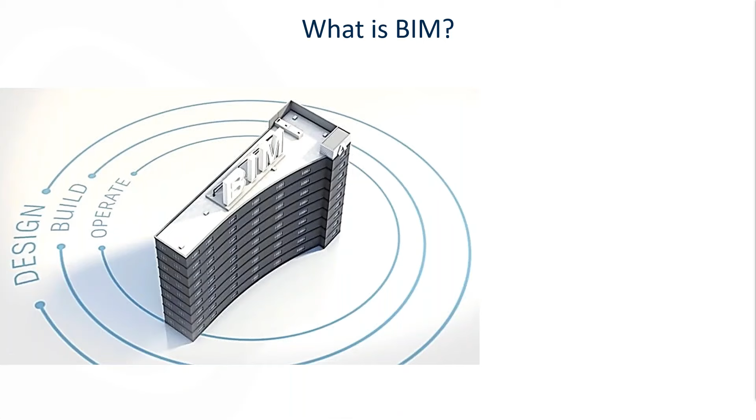Great. So first of all, let's look at BIM and what exactly it means. So if we look at BIM as ISO 19650 defines it, they define it as the use of a shared digital representation of a built asset to facilitate design, construction, and operation processes to form a reliable basis for decisions. So a built asset includes but is not limited to buildings, bridges, roads, and process plants.

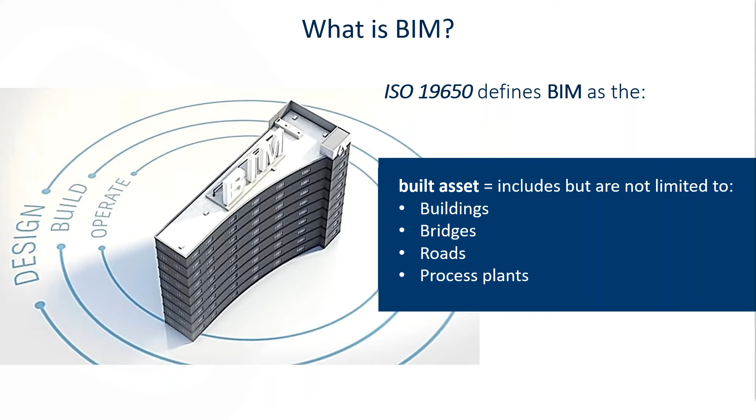So if we had to put this in more simple terms, when we look at what BIM means, I like to break it up into 3 tiers. First of all, BIM stands for Building Information Modeling, and it's a working process. So some people confuse it with a software or an object only like a Revit model, but it's really an entire working process. And with this process, it's applicable to the entire project lifecycle.

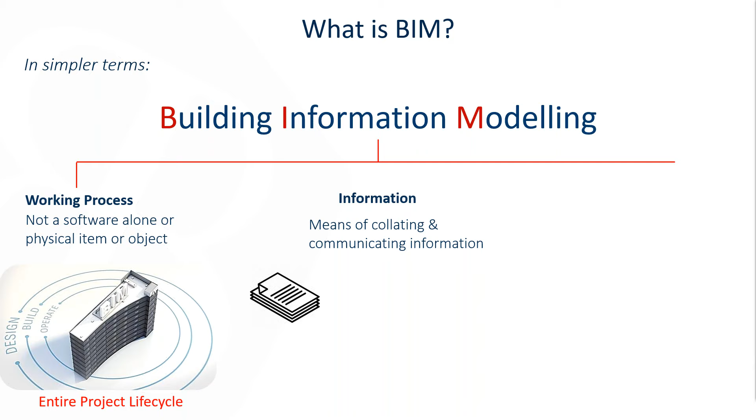Then a very important part of BIM is that it's really all about the information. In other words, it's a means of collating and communicating information on a construction project throughout the project's entire life cycle, like I've mentioned. And it's also a process whereby diverse packets of data are brought together in order to enable information exchange between the right people at the right time, which is essentially collaboration.

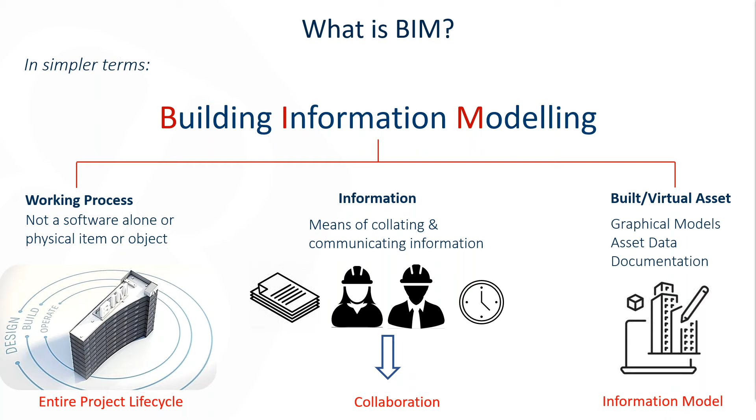Then it's also a process of building a virtual asset, which consists of graphical models, asset data, as well as documentation. This is also commonly referred to as the information model.

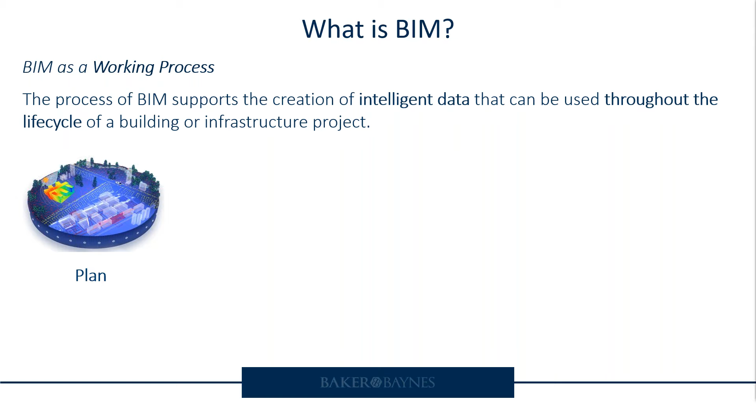Then if we look at BIM as a working process, the process of BIM supports the creation of intelligent data that can be used throughout the life cycle of a building or infrastructure project like I've just mentioned. Now, during the initial planning phase, BIM can be used to inform project planning by combining reality capture as well as real-world data in order to generate context models of the existing built and natural environments.

Then also further along the line is during the design phase. It also helps during this phase with the conceptual design, analysis, detailing, as well as documentation. And also during this pre-construction process, you can start using BIM to inform scheduling and logistics.

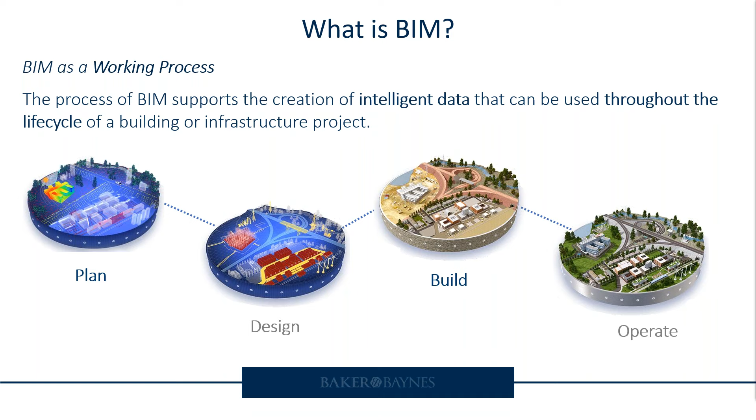Then during the construction phase, the fabrication begins using the BIM specifications that were set up. Project construction logistics are shared with trades and contractors to ensure optimum timing and efficiency. Then with project handover, BIM data carries over to operations and maintenance of the finished assets. So the BIM data can be used down the road for cost-effective renovation or efficient deconstruction as well.

Then if we look at why BIM is important, it allows design and construction teams to work more efficiently, and also it allows these teams to capture the data that they create during the process in order to benefit operations and maintenance activities.

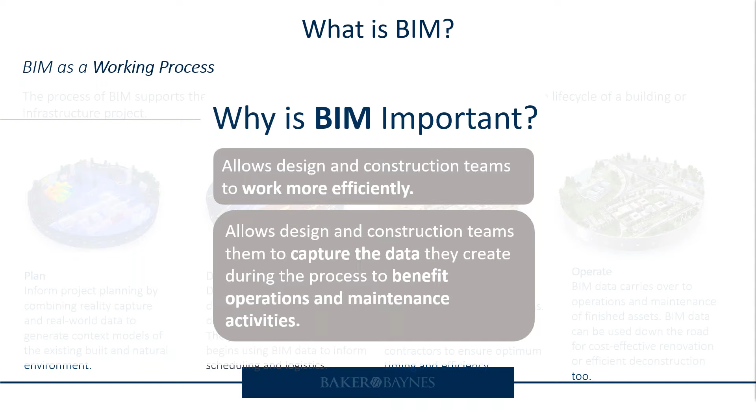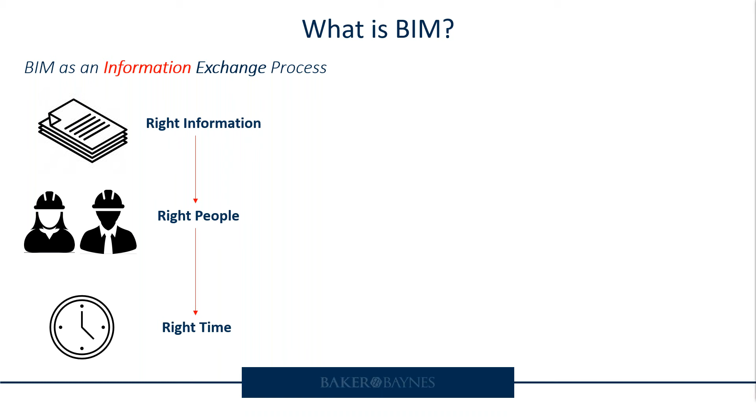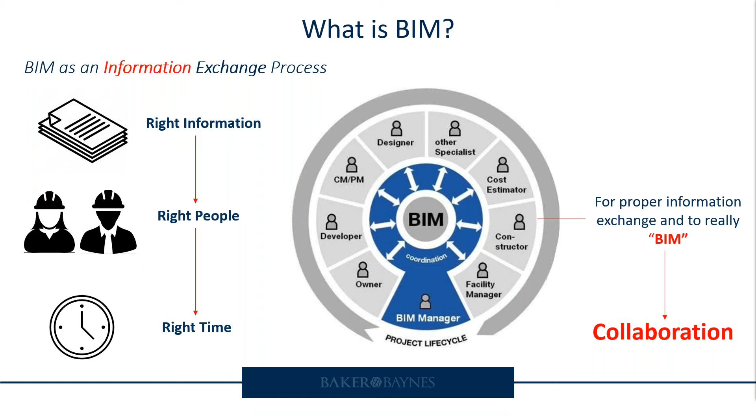So next we're going to look at BIM as an information exchange process. So like I've said, BIM is really all about the information, and it's ensuring that the right information is shared with the right people at the right time. So if we look at information exchange in the form of this chart, we realize that this process is actually collaboration in its true sense, with people having to work together. Thus, if we want to properly BIM and properly exchange information, you really need collaboration for that. You can't say you are BIMing or doing the whole process without collaborating.

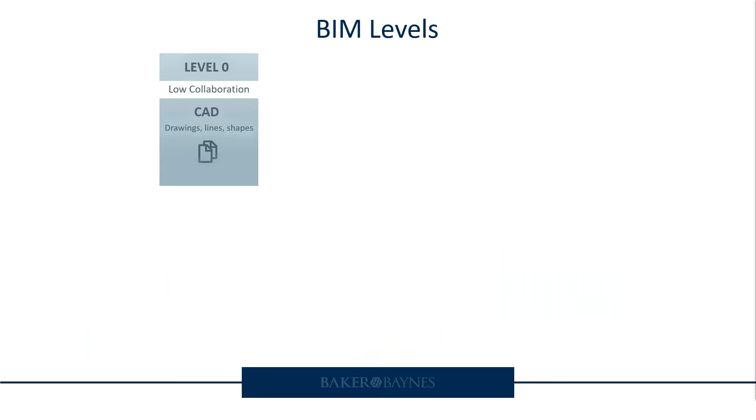The first one is level 0, and this is actually your simplest form of information exchange. So this is really, if you can describe it, an unmanaged computer-aided design, aka CAD, and it also includes 2D drawings and text. So information exchange happens on a paper-based process, and it's really without common standards and processes. You also have little to no collaboration, and essentially, this is really like a digital drawing board.

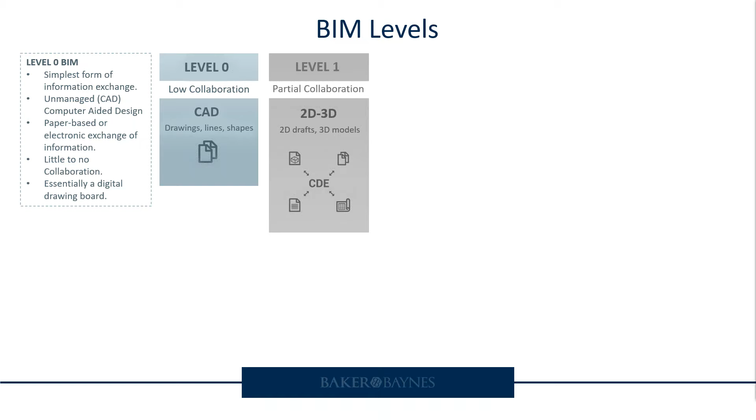Then your next level is level 1. If we had to describe it, it's more a managed CAD type of collaboration process. You tend to find increasing introduction of spatial coordination, standardized structures, as well as formats. This level may also include 2D information as well as 3D info, such as visualizations or concept development models. This level is also sometimes described as lonely BIM, as the models are not shared between project team members.

The next one is your level 2, which is a managed 3D environment with data attached, but it's created in separate discipline-based models. So these separate models are assembled to form a federated model, but they don't lose their identity or integrity. The data can also include additional dimensions, which is 4D or construction sequencing, which is the time aspect, and then also 5D, which is cost information.

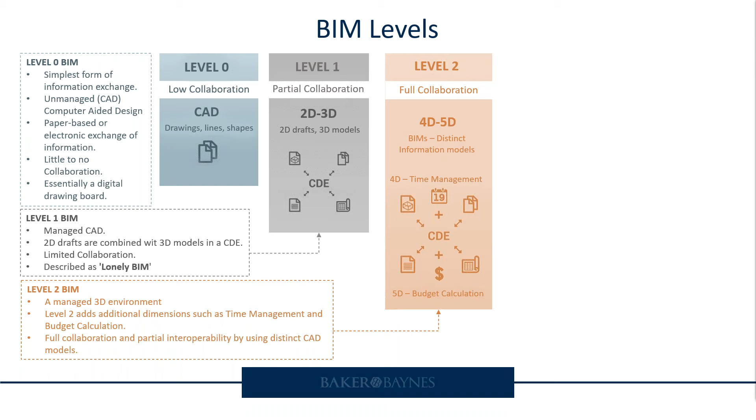Then the last one, level 3, is a single collaborative online project model with construction sequencing, which is 4D, cost, 5D, and then an added dimension, which they call 6D, which is project lifecycle information. This level is also sometimes referred to as iBIM, in other words, integrated BIM, and this level is intended to deliver better business outcomes. You will also see that you've got full integration with this level. Also at the top, you can see how the levels of collaboration vary or increase from level 0 to level 3.

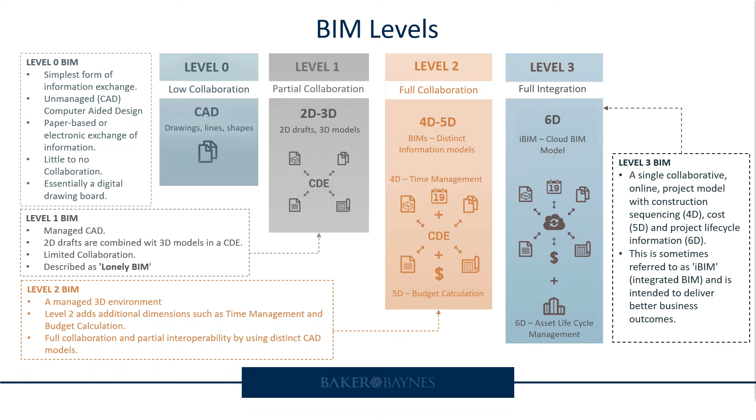So if we had to look at the various levels and where most companies typically are, especially in South Africa, it will be somewhere between level 1 and level 2. So let's say in your company, you are fully functional and you're skilled on Revit. You can create well-detailed and documented 3D models. You issue drawings from Revit and so forth, but you aren't necessarily collaborating or sharing your models and data with other consultants, especially in a common data environment, then it means that you are only partially BIMing.

And that's where a lot of people tend to get confused. Companies say they are BIMing, but it's actually only them being on Revit. And if we look at these levels, once again, you might fall into level 1, which is really a low level of collaboration and BIM.

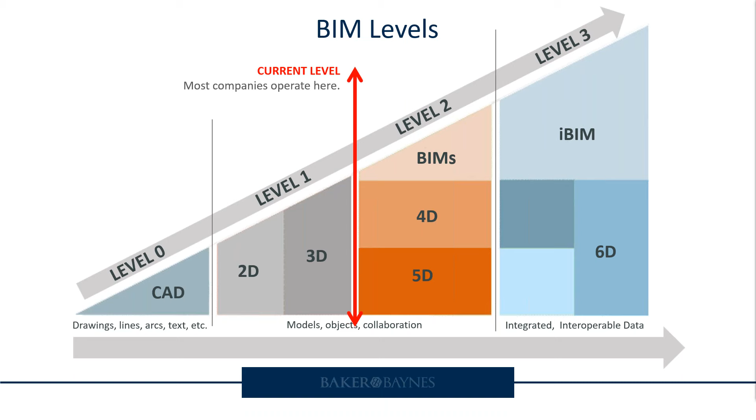So with that being said, what is the significance of the higher BIM levels, and why would you want to be on a higher level, a level 2 or a level 3? Firstly, it helps boost your productivity. The ability to share information, and to share it faster and easier, can greatly increase your productivity levels. Collaborative working can decrease the required time for incorporating and editing new information. And with increased productivity, you have lower costs and by extension, higher efficiency in terms of your project planning.

Also, BIM will offer remarkable help in handling vast amounts of data. The more effective managing of big data will change the way many professionals within the construction industry like yourself are working. BIM can also play a great role in optimizing your construction processes, thus opening up new possibilities for smaller markets. This may very soon lead to the opening and development of new markets, which up until now did not really have the right tools to expand. Thanks to a fully or partially integrated collaborative model, companies like this will be able to tackle a bigger number of difficulties that they typically face on a daily basis.

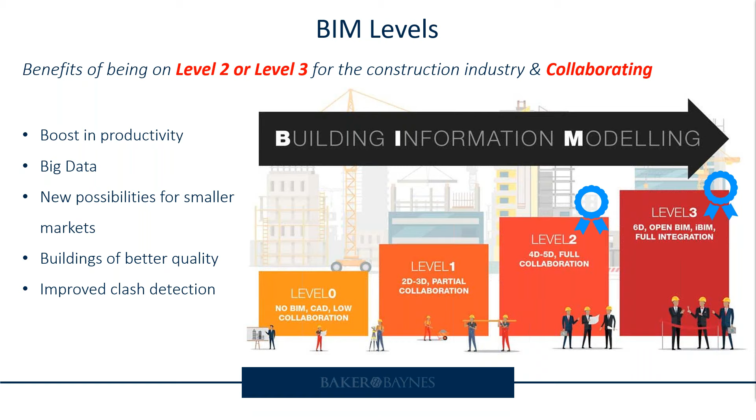Then with increased BIM levels, you get the ability to create better quality buildings. A larger amount of data, in conjunction with the ability to manage it with higher precision, will eventually lead to remarkable improvement of the quality of our buildings. And then also improved clash detection; thanks to BIM, the clash detection process is drastically improved. The term clash refers to potential mistakes that emerge during the design and construction phase of a building. The ability to pick that up beforehand will eliminate risks and a lot of errors and issues later along the line. Building information modeling can help a lot with clash detection, as a result increasing the project's efficiency.

Then looking at BIM dimensions. Now, a common misconception around BIM has to do with the BIM dimensions. So actually, BIM dimensions are different than the BIM maturity levels. So if we look at BIM dimensions, they are inseparably connected to the type of data that can become, sorry,

I just want to quickly see, I've lost my screen sharing here. There we go. So if we just go back quickly.

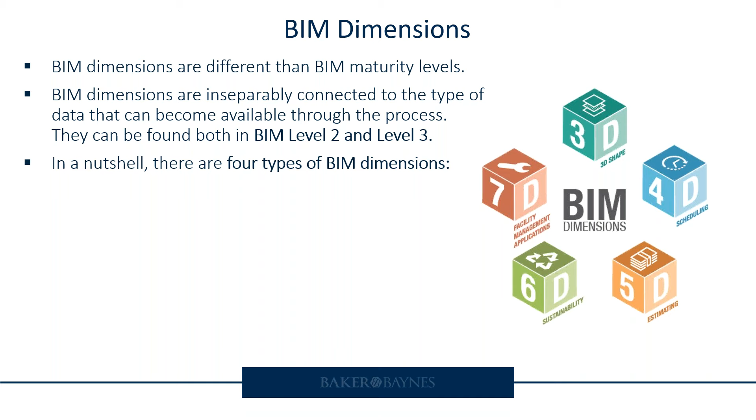If we look at BIM dimensions, they are inseparably connected to the type of data that can become available through the process. And they can typically be found in both level 2 and level 3. So in a nutshell, there are 4 types of BIM dimensions. You've got 3D, which refers to the 3D generated drawings, then 4D, which is linked to time management. 5D concerns data that have to do with the cost of the project, and then 6D, which is a dimension dedicated to the life cycle management of the building.

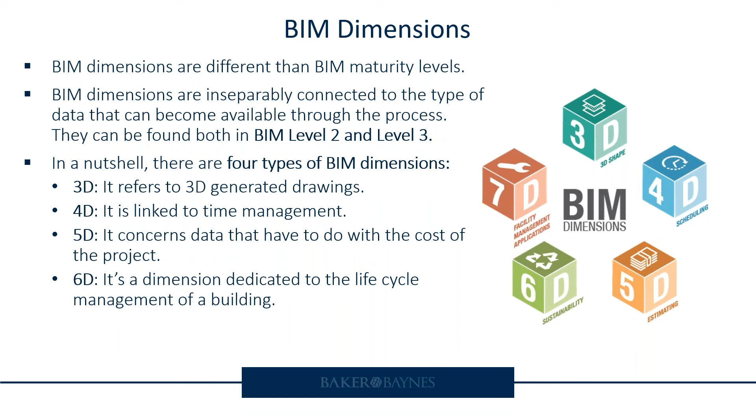So done with BIM, and you guys now have a brief idea of what it is. So we will be looking at collaboration next. So first of all, what is collaboration in construction? At its core, collaboration in construction simply means that teams are working together towards one shared project goal. So everyone can access the main plans and goals of a project at any given time in order to get the information they need.

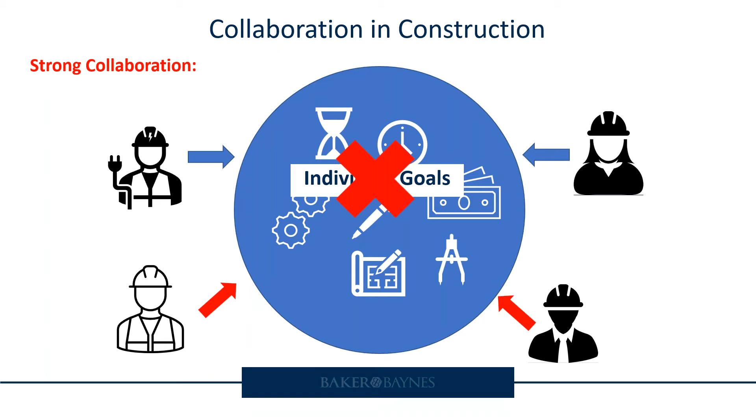If we look at what makes for strong collaboration, it's really that team members pool their resources and knowledge, and rather than looking after their individual goals, they prioritize meeting the shared goals of the project, which is dictated by the timeline and the budget of the entire process. This, of course, then is the ideal way to conduct a project. So in essence, if you wanted to say that you want to BIM properly, you need collaboration for that. You can't do without it.

If we have a look at the types of collaboration, there are typically two types of BIM collaboration. You've got your internal collaboration, which can be something like in your office environment where you are work sharing on a central Revit file, and people are co-authoring the same model at the same time. So just to recap on the term work sharing, it's basically a design method that allows multiple team members to work on the same project model at the same time.

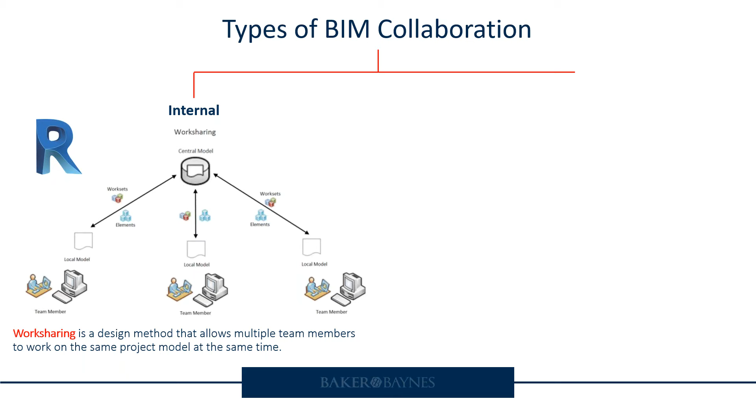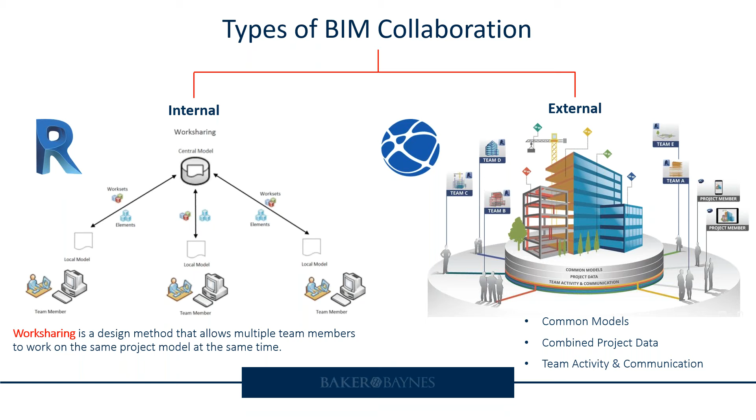Then the other type of collaboration happens externally, and it can be on a common data environment like the Autodesk Construction Cloud. We have got multidisciplinary teams who share common models with project data that are combined, and also it's a process where teams have combined activity and also communication. So if we had a look at the collaboration tools that you have available in the Autodesk Construction Cloud, there are basically two products. You've got Autodesk BIM Collaborate, and then you've got Autodesk BIM Collaborate Pro.

So starting off with the first one, Autodesk BIM Collaborate. What is it? It's a cloud-based design, collaboration, and coordination software for architecture, engineering, and construction teams to review designs, run automatic clash detection, and also track project status. It also helps improve communication with easy feedback tools. It also allows you to stay up to date with design progress. It also helps to assess constructability with automatic clash detection. It also helps to reduce rework, RFIs, change orders with better construction documentation. And it really enables you to make smarter decisions by giving you various useful project insights.

So if we had to look at the various features of Autodesk BIM Collaborate, first of all, you've got multidiscipline design collaboration. So it helps you holistically manage civil engineering, building design, and multidiscipline data using project-based workflows in one environment. You also have overarching project timelines, so you can easily see dates and contents of shared design packages, managing data exchange on multidiscipline projects. Then you also have robust access controls, so you can administer teams, projects, and accounts all in one place, and you can also secure access to relevant data with automated controls to keep the teams focused.

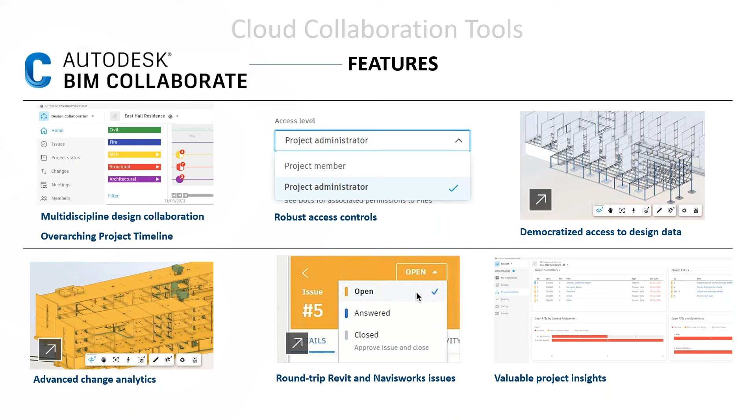And then another thing is also valuable project insights, like I've mentioned before. So you can track common issues throughout the design co-creation process using the power of your own project's data to improve planning and also predictability. Then another feature of BIM Collaborate is also connection to construction. So it gives you the ability to store and manage all project data, whether it's generated in Revit, Civil 3D, or AutoCAD Plant 3D, all in one place in order to improve your efficiency during handover.

Then also collaboration for Civil 3D, which you can use to securely collaborate on Civil 3D files, data shortcuts, as well as XREFs in one location. It also includes your easy design review, and you can do that in a web browser. And then collaboration for Plant 3D is what you can use to securely access your AutoCAD Plant 3D files across the teams and also maintain compliance requirements in a cloud-based common data environment.

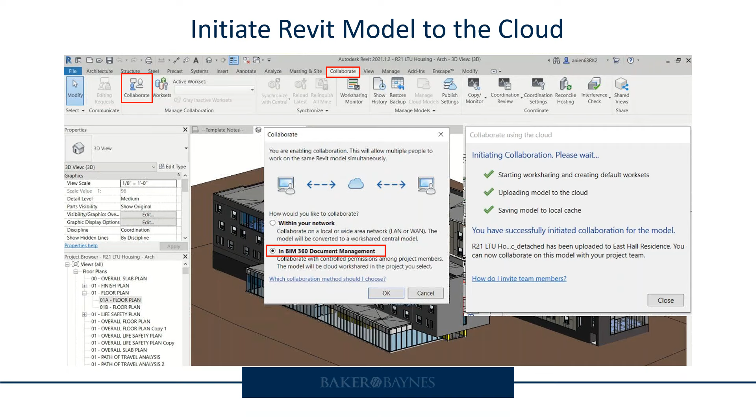So similar to establishing your central model on a local server or a local network, the process is very much the same. The only difference being that you need to select the second option, which is collaborating in BIM 360 Docs or document management. And this is basically just showing you what it looks like if your model is set up as a central model.

Then if you jump over to the platform, once you've initiated your central model, you will be able to see your Revit file. It had to be obviously saved to the correct folder of your team. And also a nice functionality with your Revit models is your version tracking, or actually with any document that you upload to the Construction Cloud.

And you can also compare versions if you wanted to.

So after you've initiated your central file, your Revit central file to the cloud, another important step during design collaboration is that you need to publish your Revit model to the cloud. The previous step was basically just saving your Revit model to the cloud, but in order for it to be viewable to other teams outside of your discipline, you will need to publish it from Revit.

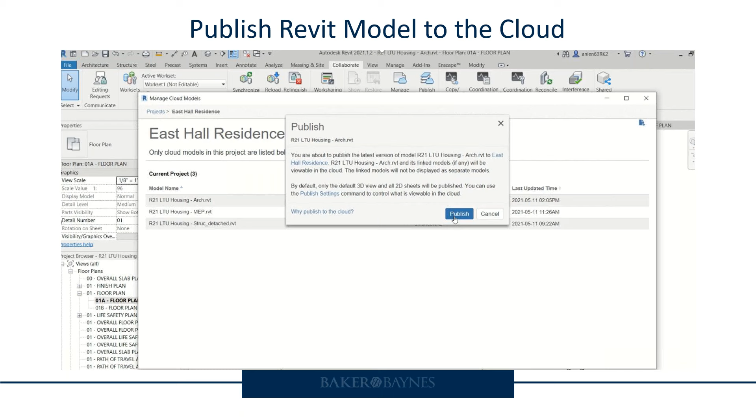As part of your publishing process, you can also choose whether you want to include certain sets of drawings. In other words, whether you want to issue a certain pack of drawings containing specific views and sheets and 3D views that you want other teams to be able to see.

This works very much like Revit's plotting process, and you can also select more than one drawing set that you want to publish.

Also with your publish settings, you can create a new set, you can duplicate an existing set, you can rename an existing set, or you can delete a set as well.

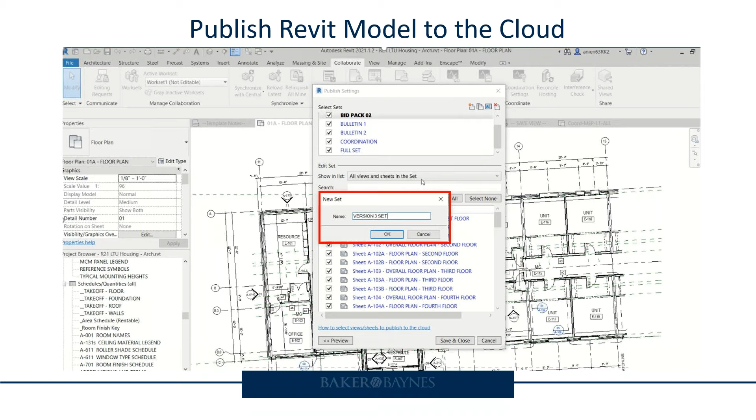And then at the bottom, you'll also see your preview button. So if you wanted to view a sheet or a view before you publish it to the cloud, you can do so.

Once you've published your model to the cloud, if you go back to the design collaboration space, back on the home page, inside your teams, inside your discipline's team space, you will then be able to see what models, views, and sheets have been published.

This also just shows you that if you've opened your model in 3D or in Explorer mode, to the left in terms of your content browser, that is basically what you and other teams will also see.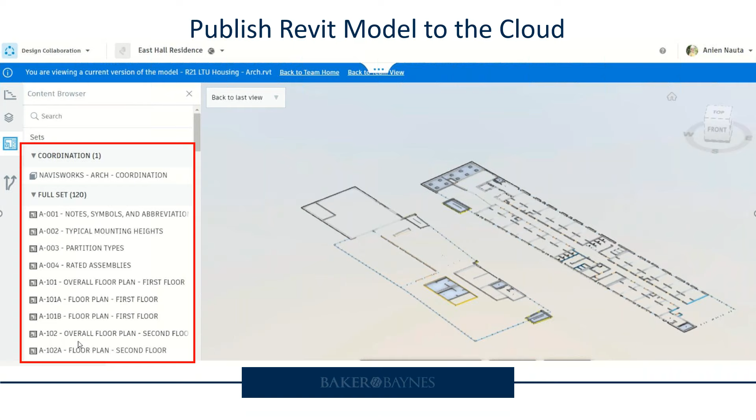So it's very important with your publishing from Revit that you choose exactly, or define exactly, what you want to share with others so that they can actually see it.

Then looking at design collaboration in action. So you've done your basic team setup, and let's assume the Revit Cloud work sharing has been done, and now we want to have a look at how this whole process across the teams works in action.

Within your design collaboration module, each team has a space where they can publish, they can review each other's teams' models, they can review changes, they can create issues, and they can also consume other teams' models. Before I start the demonstration, you'll hear a lot about sharing of packages, publishing packages, and also consuming packages.

So basically what it means is, if you share a package, it's the process of making your drawings available for other teams to see. The nice functionality about this is that before other teams accept these changes, they can view it beforehand in order to correct any potential issues or avoid any discrepancies. So that is what it basically means.

And then when a team consumes a package, it means they accept the changes or the latest revision that was shared by a discipline, and they then accept those changes into their model space. So we will be having a look at how this works.

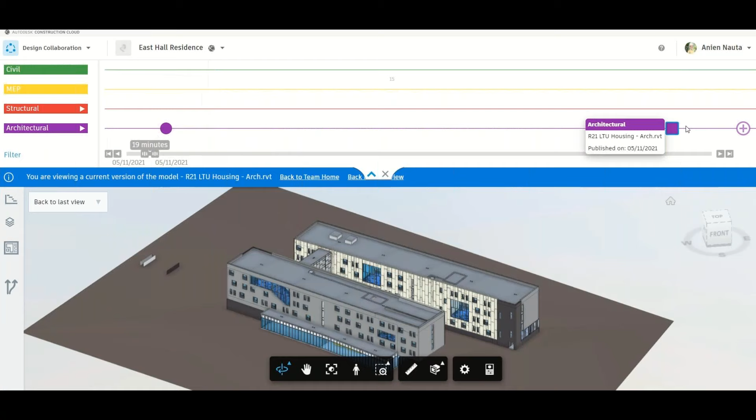They call this a swim lane, and within each swim lane you have various nodes that mean different things. For instance, that one is not a full circle, it means that a package was shared, and it gives you the date when the MEP guy shared something. This solid full circle means that the structural team accepted or consumed the package shared to them by another discipline. Here in the architecture, we can see there was a package shared, and if you click on the node, it will take you once again into the model itself.

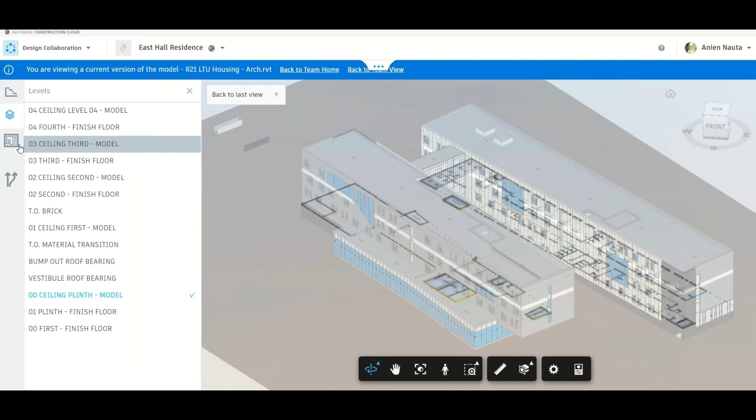This is where you can view any updates and see what it looks like. If you expand the content browser on the left, you'll be able to toggle between the various levels, creating a cut plane on the 3D model itself. All of the sets that were published, you can view as well. You can look at the various sheets, and change visualization helps you see any changes between the different model versions that were uploaded.

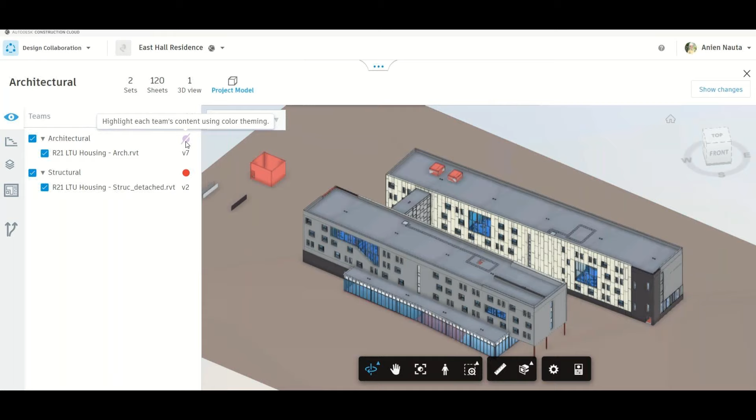Then if you go back to the team space, you can also see the different disciplines' models that were published, and you can highlight them by color coding them. It's a nice way of distinguishing between the models, and also being able to see an overlay of the models.

So that was it for just a basic interface of design collaboration and what it looks like. The next step will be to create and share a package.

Once a team has published and uploaded their model to the Autodesk Construction Cloud, they can create a package, and this package consists of their model information and any updates that they want to share with other teams. Other teams can then preview a shared package, and review changes before accepting a package, which in Autodesk Construction terms is called consume, like I explained earlier. This functionality gives teams the ability to control what they share with other teams.

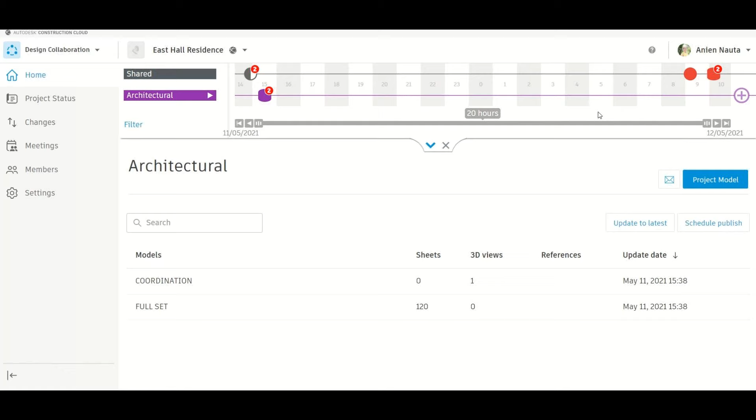So if we look at how this process works, here we are still in the architect's team space. If they are ready to share packages, they will go to their swim lane, click on the plus icon, and it will take them to the model space. From here, they need to select the various drawing sets and views they want to add to the package. Any documents they want to include can also be added.

In terms of the documents you can include in a package, supported files are obviously Revit or IFC files, and you can also add documents from your project files, which are file types like Excel sheets, JPEGs, text files, RTFs, and doc and Word documents as well.

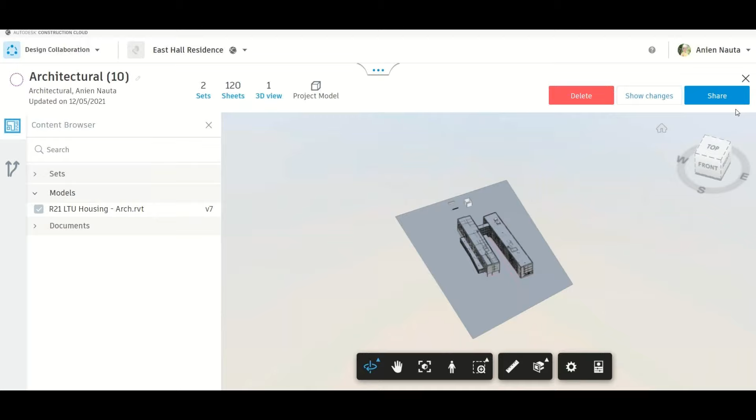Once you've selected what documents and drawings you want to include in a package, you will click on Save, and then click on Share Package. From there, you will give it a specific name, and you can also add a description for the package, then click Share again.

Now if we look back at the architect's overview of their team space, we can see the details, and we can see that the node has changed. It's now solid, which means that package has been shared. Another team that now looks at their swim lane can see on the timeline that a new package was shared and it's ready to be viewed.

This is also showing you what it looks like when an email notification is sent about a package that was shared. If you want to view a specific package, you can just click on View Package, which will take you to the platform itself.

Next we're going to look at what a shared package typically looks like, and then before you consume another team's model, you can review it and also explore changes before you actually accept it.

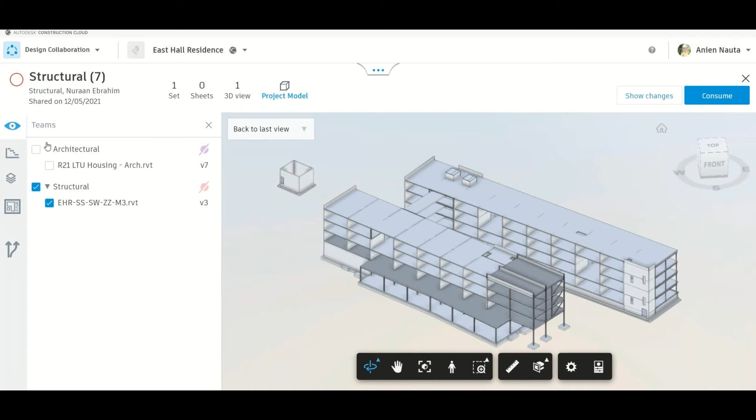Show changes also visualizes the change between the various versions. And then once again, you can have a look at the various views and sheets that were shared. Also nice is your team space, where you can overlay the various disciplines' models and also color code it as needed.

Following from the previous slide, where the architect now explored the updated model shared by the structural team, if he or she is now satisfied with the changes, they can then go ahead and consume that package, meaning they accept the updated structural model into their respective team environment.

So on this slide currently, you can see that structures shared package is still selected. You can also notice that the appearance of the node is still empty, which means it has only been shared. It hasn't been consumed yet.

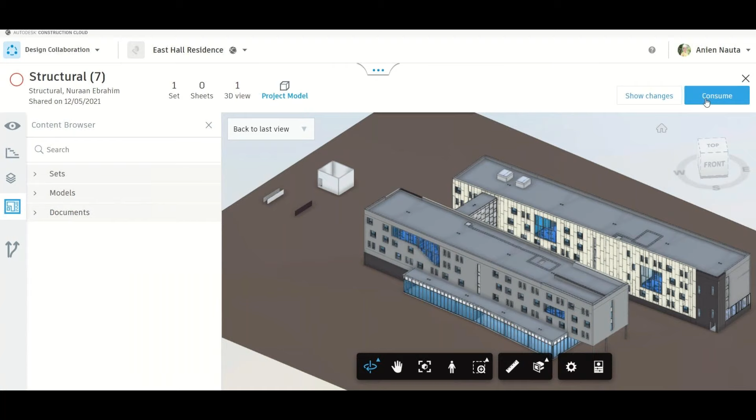So if the architect wants to consume the package, he can either do so by clicking on the consume icon, or he can open the package from the swim lane as well. But before he consumes it, he can first explore the model. If he's ready to consume the changes, he will click on consume. This is just a prompt asking whether he's sure he wants to go ahead.

Once that is done, we can also see that the node has changed to solid, meaning that it's now consumed.

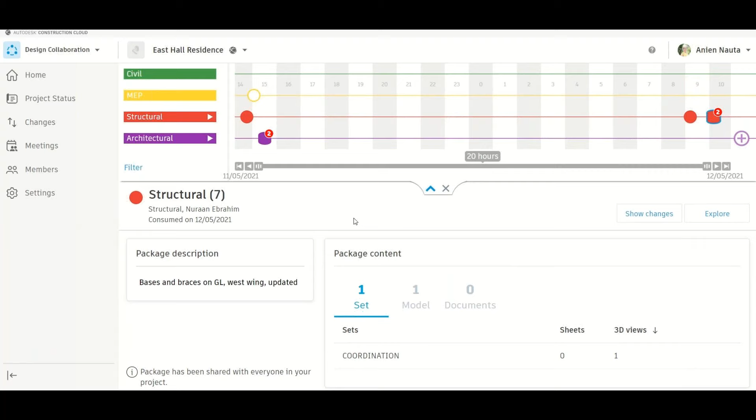So that was it for a very brief overview of how BIM Collaborate Pro works, and also how teams typically collaborate on it. Before we end off, I just quickly want to run us through some takeaways from today. I thought it would be a good idea to talk about what successful collaboration looks like, or aspects around it.

First of all, streamlined workflows is really important. In other words, everyone knows their role, they know where to get information, they know how to communicate properly, and they also feel safe completing their duties and allowing others to finish theirs. A CDE really allows you to have streamlined workflows, like I've shown in previous slides.